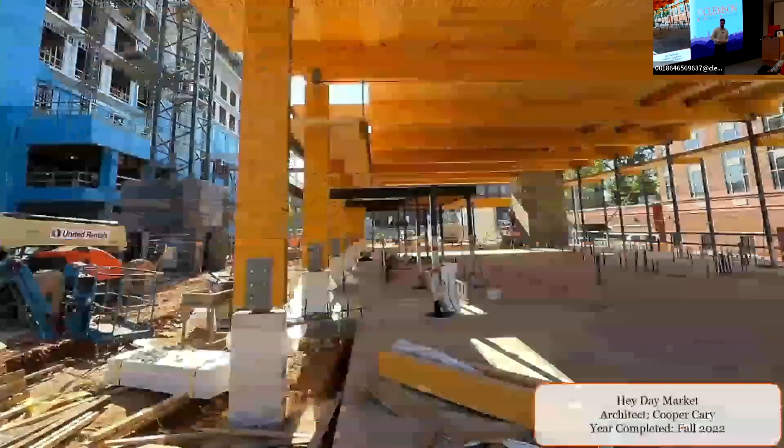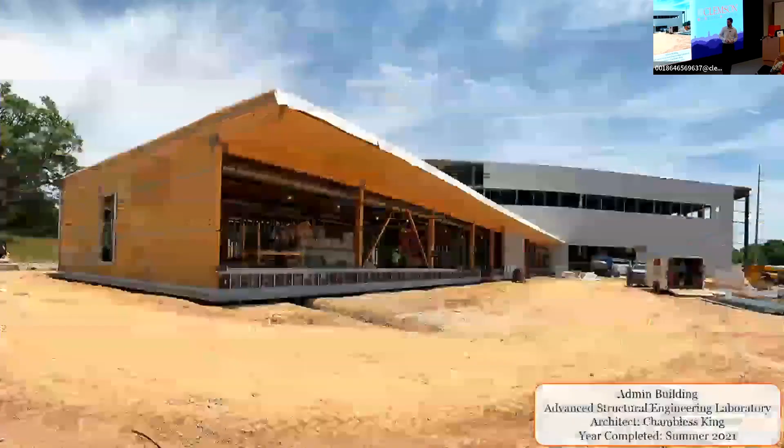So I'll start off with, here we are in this room. I'm assuming most of us are advocates for mass timber and timber buildings. And so I'll just show first a few examples of some timber structures here in Auburn that we're very proud of, and a few others that highlight why we love this material so much. This is the Heyday Market and the Culinary Center right next to it that Auburn opened in fall of 2022. Beautiful building. Glulam columns, CLT ceiling, and this is what it looks like right now on the inside with a lot of different shops. Students operate a lot of the spaces, and it's been a very popular hangout spot since it opened. A beautiful building.

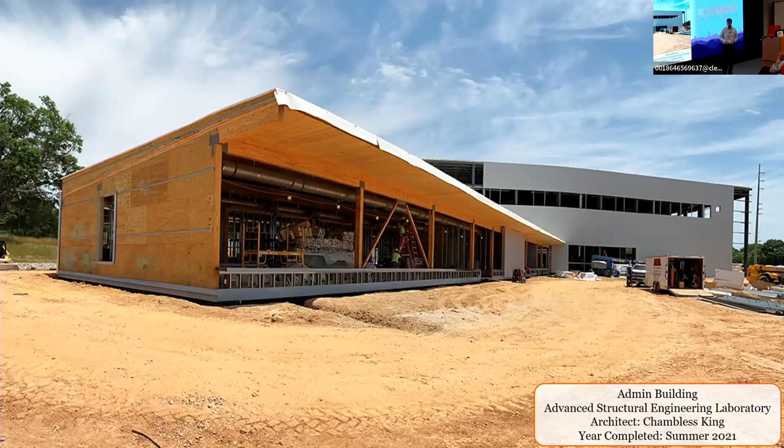I would also highlight something near and dear to our heart. This is the admin wing of our Advanced Structural Engineering Laboratory. This opened in summer of 2021 and was actually the first mass timber building on our campus. And so we take a special pride in that. As part of it, we had a mass timber building, a steel building, and concrete, kind of a back wing. So we tried to represent all the different materials under one building. This is the outside of it under construction, CLT ceiling, glulam beams, and heavy timber columns. And this is what the inside looks like. This is our grad student spaces, and it's a very open, inviting, great collaborative space to work in. And of course, very proud of this building as well.

And then I thought I'd highlight a couple others that I've really enjoyed that you all should be familiar with. So of course, we have the Andy Quattlebaum Outdoor Education Center. I really loved being able to visit that over the summer, and it looks like a fantastic spot. My only disappointment was that I wish I'd brought some stuff with me and had some time to take some kayaks out and enjoy that space. It looks like a wonderful resource.

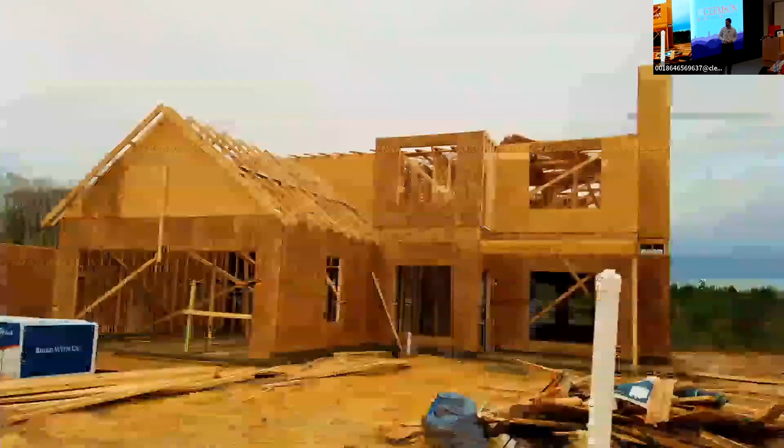But I also want to call attention, with all that's going on in mass timber, and it's wonderful, it's really expanding the market for timber. Let's not forget about the low-rise single-family home. I was doing some rough calculations this morning. About 18 million tons of lumber each year go into light wood frame. So there's still a ton of market for this. It's growing.

It's necessary to maintain affordability of our structures and provide for affordable housing throughout the U.S. and really around the world as well, which is such an important concept as we adapt to climate change and just everything else that's changing in our world.

And in that, I'll throw a quick plug in here for the Rural Studio for our architects. You may be familiar with this. Rusty Smith and their team do such a fantastic job doing low income, affordable housing, and doing just a great job with those designs. And this is a necessary part of it in the utilization of wood in many different structure types.

But I want to turn our attention, as we think about, yes, we can look at timber and see the benefits of it and the affordability and the aesthetics of it and appreciate that. But how do we formally capture just how much more beneficial, say, timber is than these other structures? Some of you may be familiar already with life cycle assessments and that process. It used to be more restrictive, but it's becoming more and more common even in engineering to do these life cycle assessments.

If you're not familiar with it, basically it's a way of tracking from raw material, which in the case of wood, you're talking about forest management, all the way through the processing of that material into actual building materials, and then into construction, and then into the use and repair and maintenance of it, all the way to end of life and the deconstruction and where does it go afterwards? Is it a landfill? Is it recycled? And so on.

And these frameworks, and there's lots of different ways the details of these come out, but these life cycle assessments allow us to holistically capture the entire system and be able to compare between, say, timber, mass timber and steel and concrete, and look at things like total embodied carbon or total embodied energy over the entire lifespan.

What I want to highlight here, it's a little bit small, but up here in the top right, a lot of these assessments are done making some assumption of what the lifespan of the structure is. Typical lifespans may vary, but oftentimes it's somewhere in the 55, 60 to 75 years. And so we work these cost benefits and holistic assessments off of this normal use and normal life cycle.

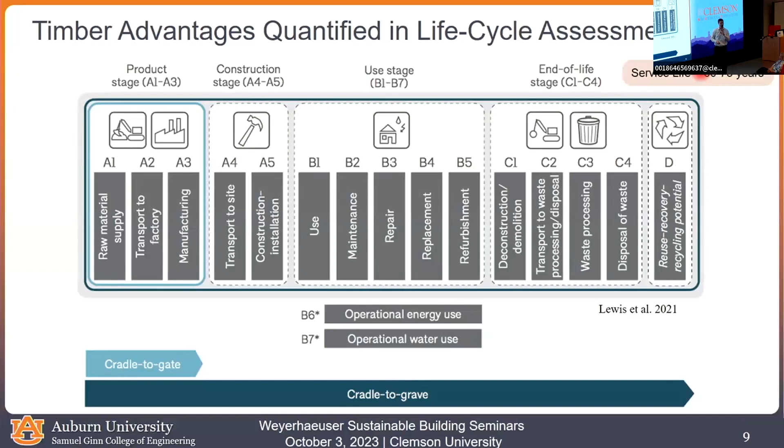What I want to talk about today, though, is what happens when these extreme events we designed for come and interrupt that life cycle. We're talking about quantifying sustainability over the course of 60, 75 years. What happens when 5 years into the use of the building, the extreme event happens? And the extreme event could be a tornado.

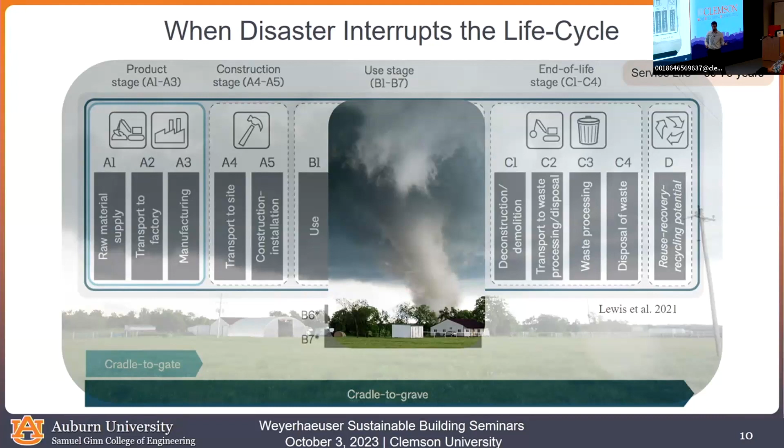I may show my age here. It could be something really extreme, the ultimate unprecedented Sharknado that comes through. You never know. Things change. I don't know how many people have ever actually seen Sharknado. Okay, there's a few brave souls out there willing to admit it. All right, I have not. I've seen clips. That's as far as I'm willing to go with the amount of time that I have.

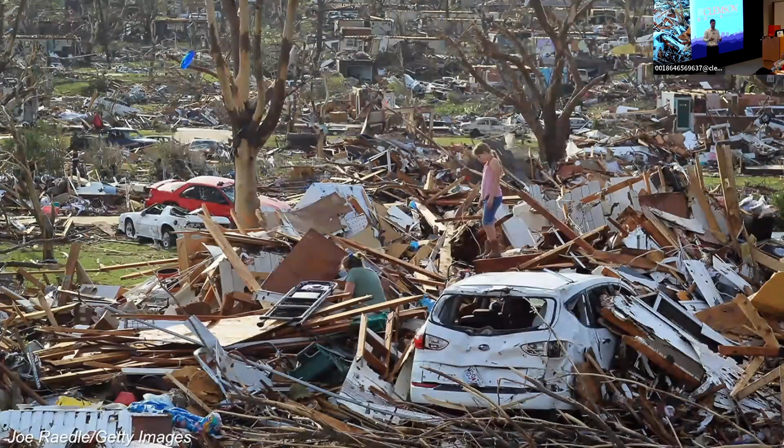All right. So anyway, something like that happens. What happens afterwards? Unfortunately, too many times, and this is what I started my graduate work on, it looks like this afterwards. These timber buildings, light wood frame especially, get this bad rap: yes, it's great, it's affordable, it's easy to construct. Then the event happens and now it's all scattered all over the place. And this is the reputation that's out there for stick frame buildings.

And I see this time and time again after a tornado, after a hurricane, the media tends to focus on the damage. And then you get all the public opinion that's like, why in the world are we still building with stick frame? Why haven't we outlawed that yet in tornado-prone regions? That sort of conversation.

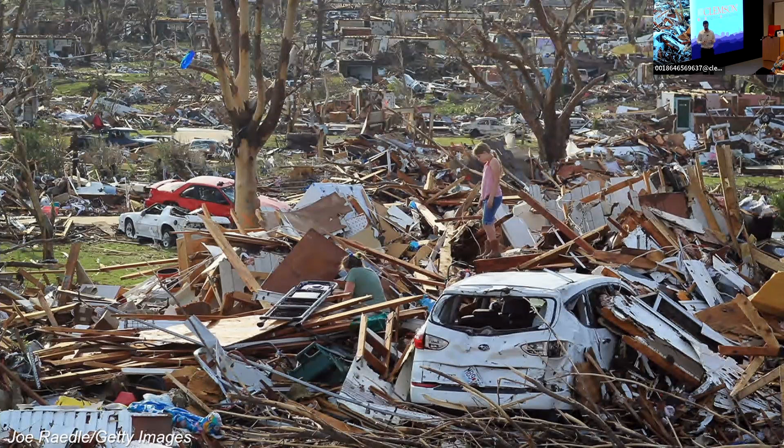And so one of the things that I've done as part of my career, both in grad school and I continue to do it now, is doing lots of these assessments. It's probably been close to 40 now, different hurricanes and tornadoes, going out and doing these types of assessments afterwards, looking at what failed, why it failed, what can we do better, what can we learn from it, and trying to turn this into actionable data that we can learn from and use.

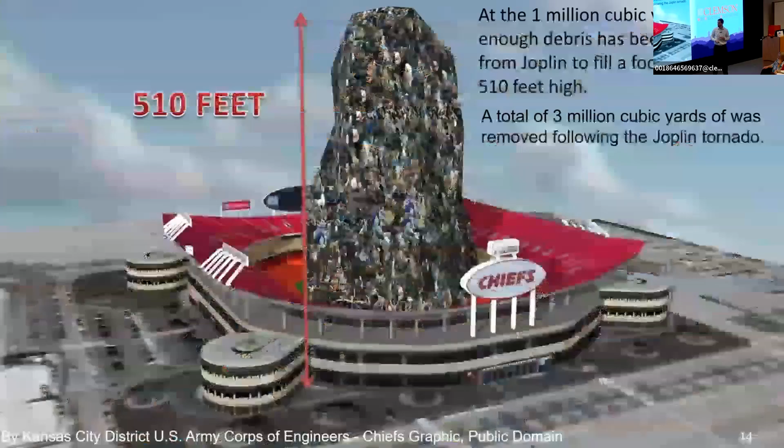Let me extend this a little further, but first a quick point: all this debris we see, when we talk about sustainability, that's not sustainable. This is from an event like the Joplin tornado. The Army Corps of Engineers put together this graphic looking at the amount of debris generated, a total of 3 million cubic yards, the vast majority from timber buildings that were destroyed and their contents. One million cubic yards is enough to fill a football field 510 feet high. So 3 million cubic yards of debris generated by a tornado like this, and all the benefits we had, the carbon sequestration and so on, is now in a landfill somewhere or being incinerated, and we're losing those sustainability benefits.

The takeaway, which we'll touch back on at the end of the presentation, is that we can't talk about sustainability without also talking about resilience. In my mind those are completely linked; we can't have one without the other. There are many different ways of defining resiliency, but I'll use the National Academy's definition: the ability to prepare and plan for, absorb, recover from, and more successfully adapt to adverse events.

With climate change, our hazards are changing, but you can also simply look at our exposure—how we have growing populations in vulnerable areas. With the growing population here in the US and around the world, what does that become? More targets, if you will. Even if the hazard stayed the same, there's more risk out there that we have to adapt to, be able to absorb, and be able to recover from.

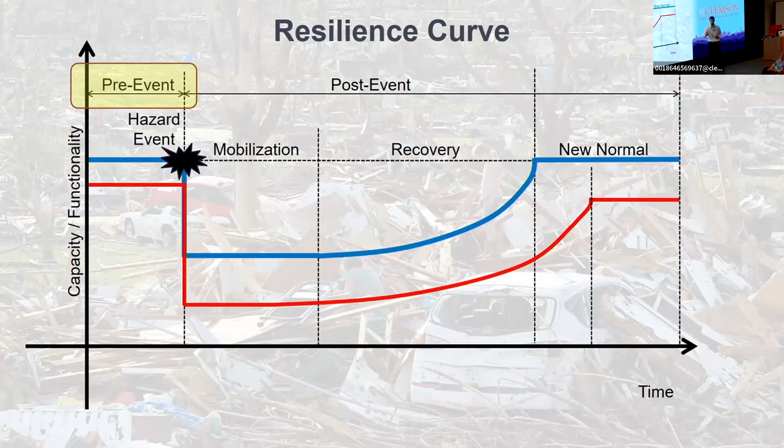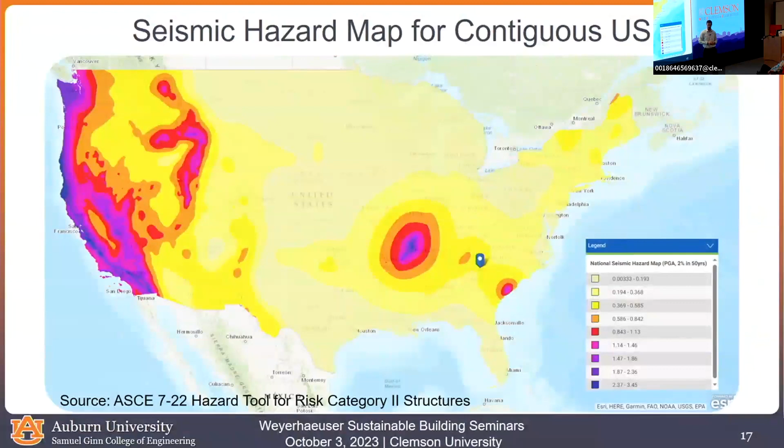What about all the tornadoes? Well, currently, as of ASCE 7-22, there are now some provisions for designing category 3 and category 4 structures for tornadoes, but we still ignore tornadoes for everything else.

We don't consider tornadoes because of the low probability and because of some of the uncertainty in the loading, and so on. So when you talk about resiliency, and about our design levels and how our buildings perform, what can we do to make our buildings more resilient?

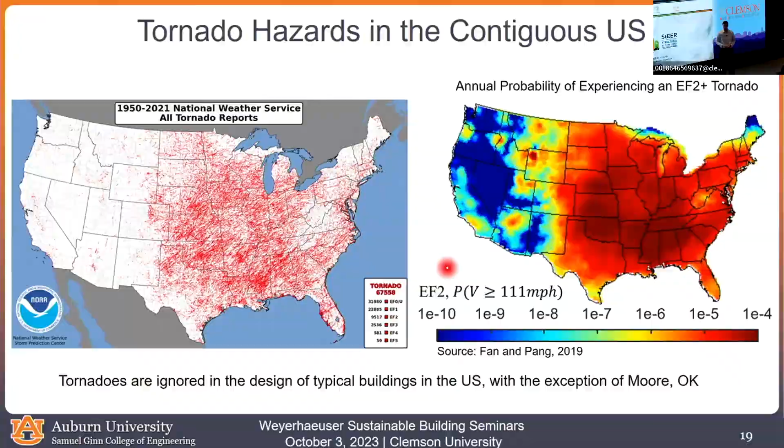I'll put in a quick plug here for the STEER network. I'm an associate director of this - it stands for Structural Extreme Events Reconnaissance Network, funded by the National Science Foundation in 2018. We've been going all over the world doing post-disaster reconnaissance efforts, building the capacity of the community to respond to disasters - earthquake, hurricane, tsunami, etc. - and also developing standardized data sets from these.

For example, here are the 58 different events we've responded to so far. It includes hurricanes Michael, Idalia, and Ida, and different tornadoes as well. Some of these are virtual responses, and some of these are in person.

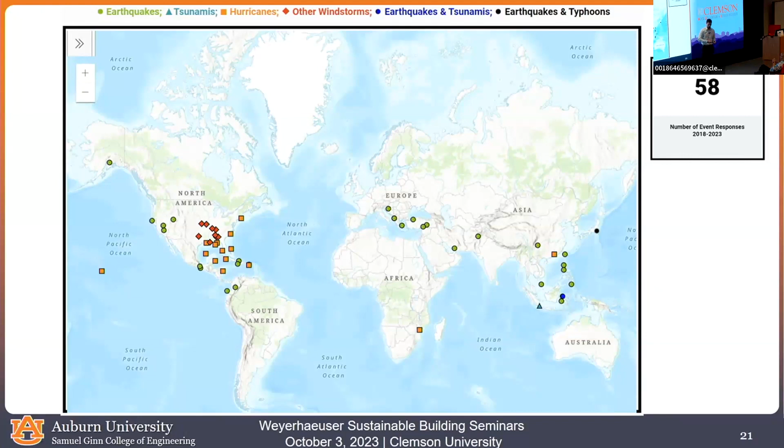As part of these responses, particularly the field responses, we collect lots of data on how different buildings perform, and we do this in a number of ways. We may have performance assessments in a smartphone app, a survey we fill out for each one. We utilize street view cameras, surface level panoramas as we call them, drones, and all sorts of other technologies to essentially freeze the disaster in its place, capture as much data as we can, and then try to learn from it later.

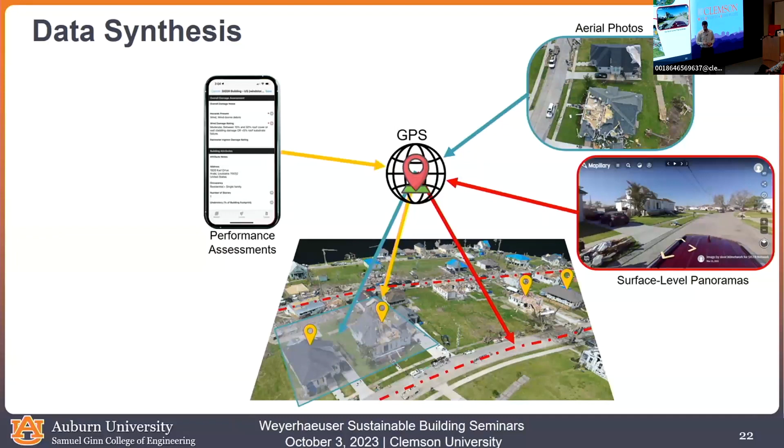When we collect all this raw imagery, we can combine it and synthesize it through GPS to get a complete picture of the disaster - this perishable data - and link it to the hazard, and to other building attributes and characteristics, so that we have a standardized database of building performance after disasters.

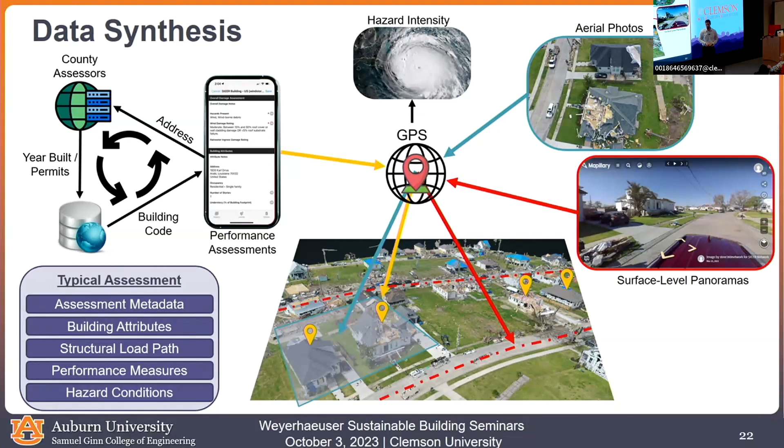We've been doing this since 2017 for me personally, and then StEER came along in 2018 to formalize a lot of this. There's lots of data now to look at how our buildings are actually performing, and a lot of these are wood frame structures that we've been looking at.

I'll put a quick note in here that all of this data is also freely available - it's on the NSF DesignSafe repository. If anybody wants it to train some machine learning model on, or do any sort of modeling aspect, there's a lot of good data out there for you to use. If you'd like to know more about that, let me know afterwards.

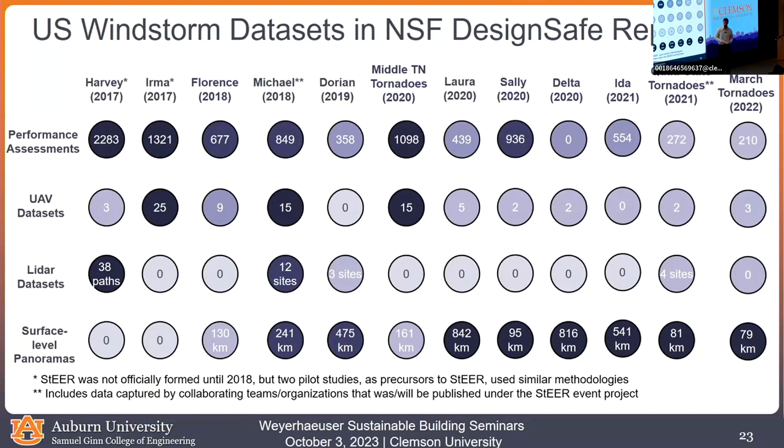I want to talk next about what we're actually seeing from all of these assessments we've done - basically 6 or 7 years of doing these standardized assessments. So what I'll do is show a plot here in a second that talks about what we call component level building damage - looking at percentage of roof structure, roof substrate, roof cover, wall, etc.

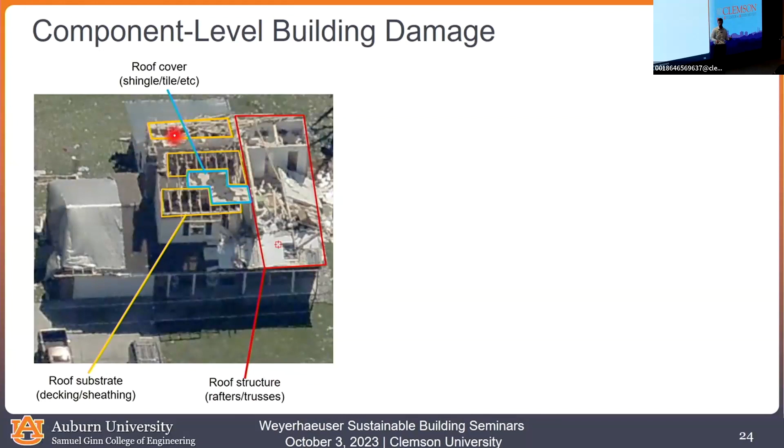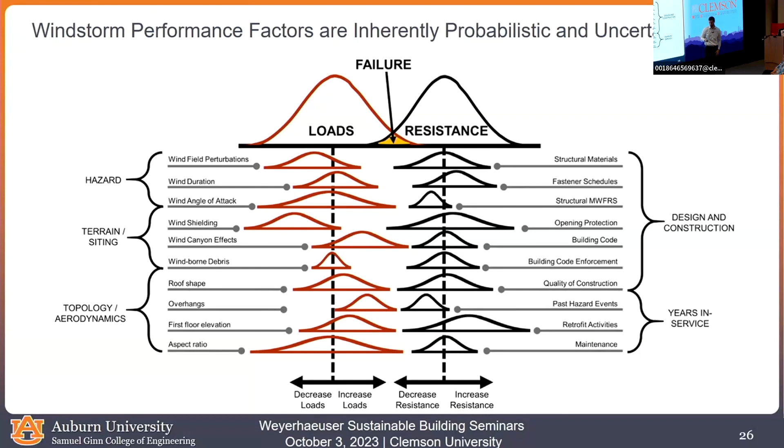So we're trying to unpack some of this. I'll show you a few things we've learned that are practical, tied to light wood frame construction and making it more resilient for tornadoes and hurricanes, with applications to earthquakes as well. One of my PhD students has been working on idealizing the entire load path of a typical home into a chain—what we call a load chain.

If you walk down a typical load path, you've got your rafters, then your roof to wall connection, double top plates, sheathing, and studs. Then you come down to a bottom plate and joist, and then it may either be on a concrete slab or on a masonry stem wall. There's lots of different ways we can come up with these different load path configurations.

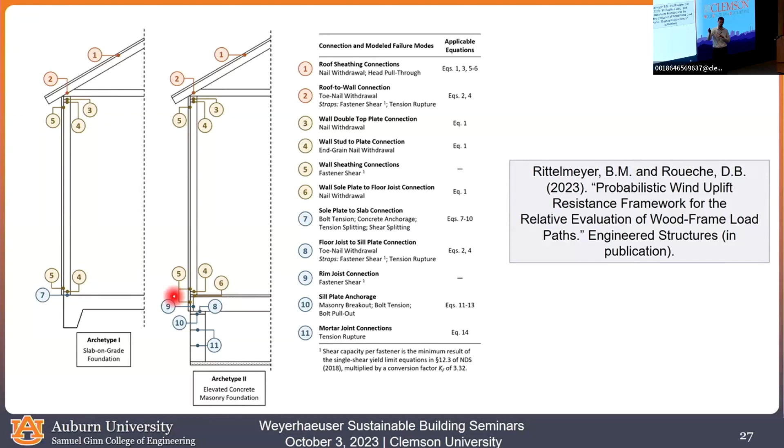He's essentially worked out which ones are in parallel, which ones are in series, and idealized this as a chain. So a little thought experiment before we go further: which chain is stronger? What's the strongest chain?

I have a vote for the top one. Any other thoughts out there? We should limit it—no professors can answer. Just kidding. All right, deterministically or probabilistically? Well, look at the variance of the two.

In a simplistic version of this, a chain is only as strong as its weakest link. So we have a gold jewelry chain—not very strong in and of itself. Now we've placed a really large, strong steel link in the middle of the jewelry chain. But is that link going to do any good? It's just going to find a failure somewhere else.

What most of our wood frame, especially light wood frame, prescriptively designed or prescriptively built structures look like is this bottom example—most of the construction I see when I go out and do these assessments. You have an anchor bolt with a ton of strength, and then the next link in the chain is some really weak connection. You have these very disproportionate strengths strung together, and we're only as strong as our weakest link.

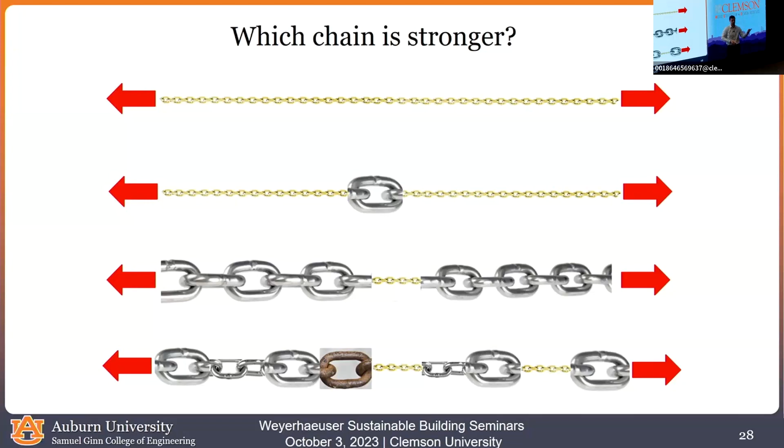So wind is simply looking through it, finding the weakest link—there's the failure. Let me identify a few of these examples just to ground it in reality, with some practical things.

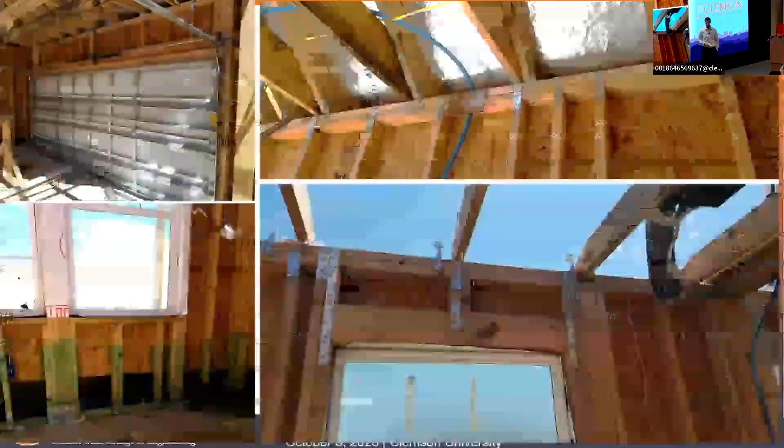Looked inside, and they've got straps everywhere—roof to wall connections tying the rafter to the top plate, top plates tied to the studs, a braced garage door, straps everywhere. Look down at the wall to foundation connection—straps all over the place, anchor bolts, half-inch anchor bolts at 6 foot on center, oversized washers. We saw this and thought, okay, this is what we're telling everybody to build like, and it just got demolished by a hurricane.

What's the problem here? A little forensics, and here's the failure sequence. One, it was a construction site, so there was lots of debris flying around from loose construction. On the front, there's a smaller garage door that a piece of large debris impacted, creating a large opening. The wind enters that opening and pressurizes the interior of the building.

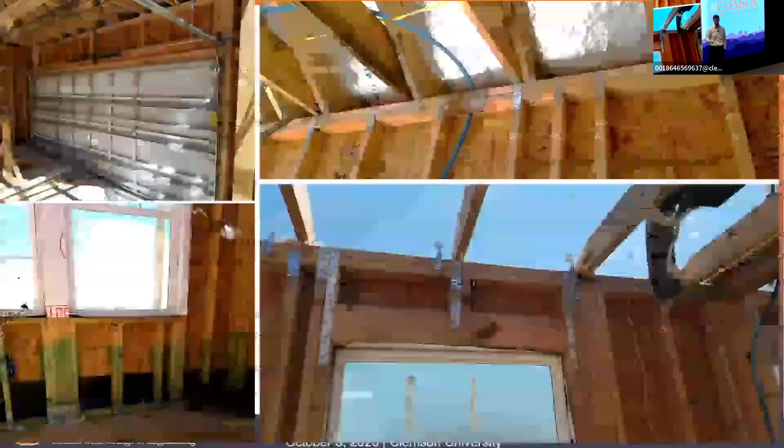Wind is going to find a weak link—and what was the weak link? Up at the ridge, where all the rafters come together, there were no straps, nothing—it's just toenailed into the ridge. So it starts to peel up there, wind catches it, flips the whole thing over, and now you've lost your roof. All of those straps that were there didn't matter; they demolished the house and had to start over again, because wind found the one weak link in the structure.

So what I've been trying to do in a lot of our assessments recently is model and identify in the field these common weak links that we're seeing. I'll highlight a few of these.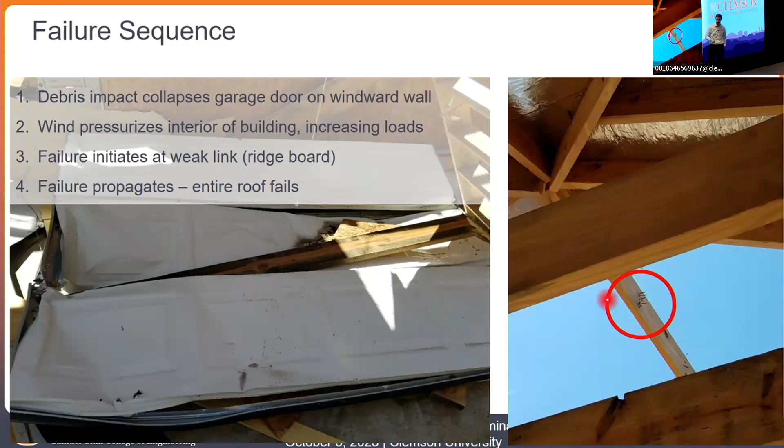Starting at the top, the roof sheathing or decking, the top of the load chain. In order of increasing capacity, there are things we can do that go from weak to strong. First, fastener spacing. 6-12 means 6 inches on center on the edges and 12 inches on center in the middle. We could increase that to 6-6 in some coastal areas, or even 4-6, where it's 4 inches on center on the edge and 6 inches on center in the field region of the decking. Capacity increases as we increase the number of nails.

We can also change the fastener type. A lot of older homes use staples, which is really not a good way of doing it. There are common nails or smooth shank nails, deformed shank nails, which are ring shank or spiral shank and are really good, and screws as well. I'll show some differences between the capacities here in a second. Lastly, you can increase the length and diameter, and all of these will increase the capacity.

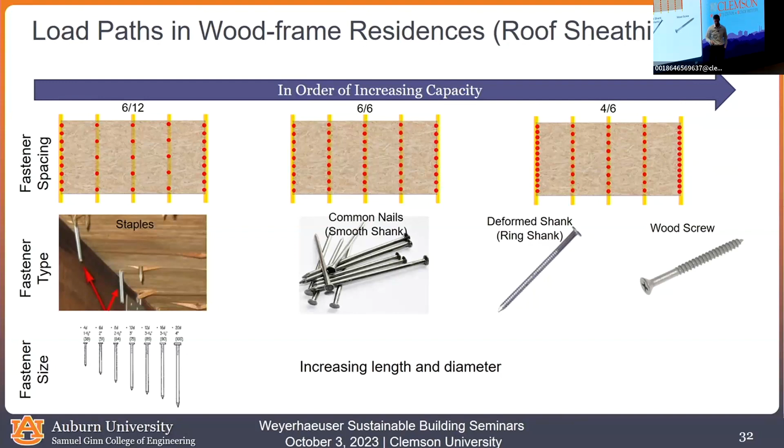To give you an idea, if we use a smooth shank nail, a 4D nail, which I've seen in a number of buildings, with typical 6-12 spacing, we get a mean resistance of about 40 PSF, which is in the EF0 tornado range. If we keep the exact same spacing and switch to a ring shank nail, we're up to 170 PSF, in the EF3 tornado range. Same spacing, really no cost difference, just switching to a deformed shank nail, and the capacity jumps up almost 4 times.

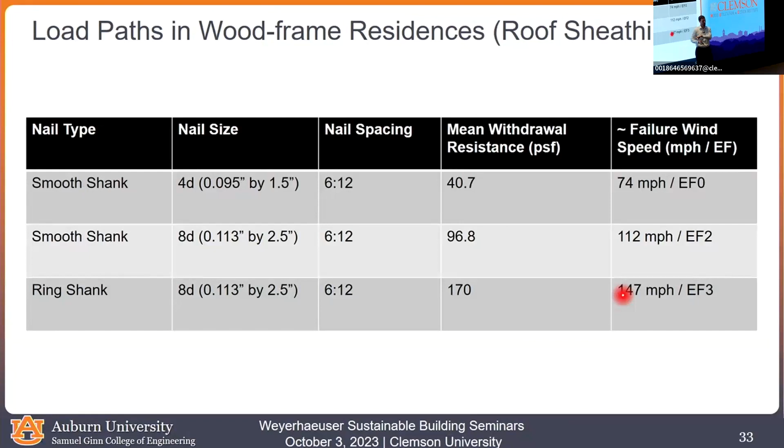But then, of course, that's our nice model of what it should be. And then you have the real world, right? So in the real world, what happens?

You get lots of what we call shiners, where they miss the nails. We saw this in Arabi back in 2022 - some missed nails. You also have a lot of nails that are really close together, which ended up splitting the sheathing and creating a failure point there.

We also had, here on the far right, where they basically overdrove the nails, using a nail gun at too high a pressure, shooting through half the panel as it goes into the wood. Now the panel just pulls out around the head - the nails are still stuck in the wood, but the panel breaks out around it. So you should have 150 PSF of pressure, but from a modeling standpoint, you may only be getting 100 because you're compromising the structure.

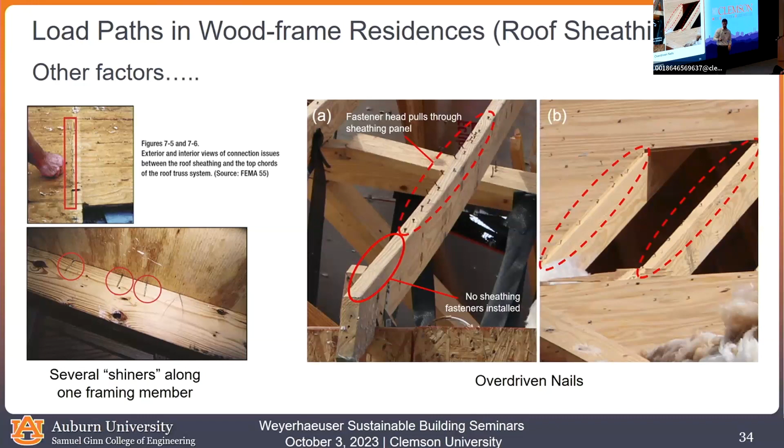This is Rolling Fork, Mississippi - some of you may have heard about this one earlier this year. Apparently there were a lot of shiners or missed nails, because there are entire rafters with no nails. Panels are gone, with no nails in them at all. So this is kind of the real world.

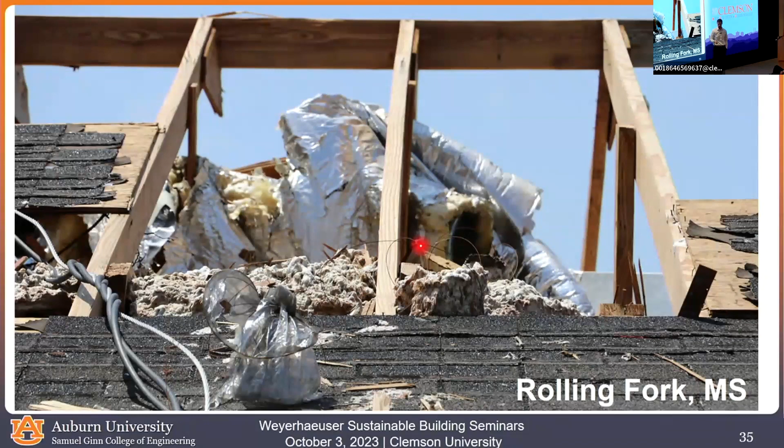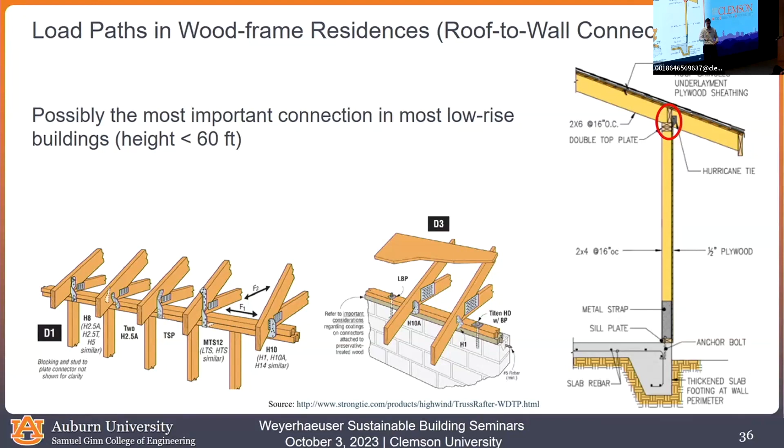Roof to wall connections - this is perhaps the most critical connection in light wood frame construction, because if you can keep the roof on, that helps hold the walls together and provides life safety. There are lots of ways you can do this connection, but what are we seeing here?

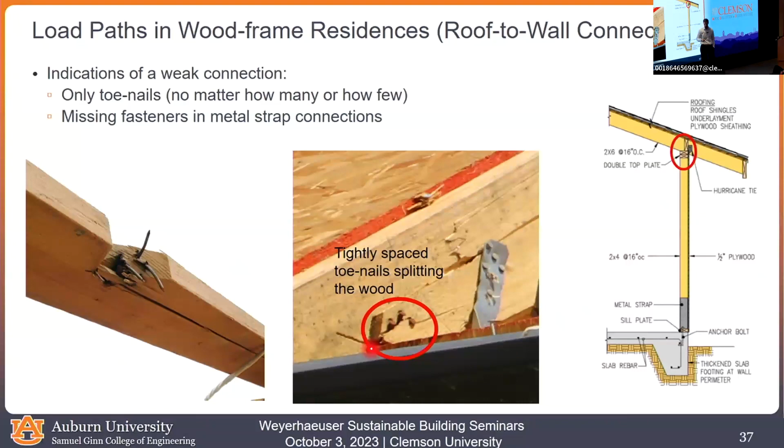In a lot of our older buildings, we're still using toenails, which just use angled or inclined nails - you can do it this way, but it's not a great way of doing it. I'll show you capacities here in a little bit, but they'll maybe put them too close together and split the wood, or not use enough. Either way, you're limited in the capacity you can get there.

Or there's things like, again going back to the Rolling Fork, Mississippi tornado earlier this year, where they're using a clip of some kind - it may be a little hard to see, but there's only one nail, up in the top left, and that was it. Now you might say, but hey, it still stood, right? This was further away from the path. These are all very similar homes, and all the ones closer to the tornado path were completely wiped out.

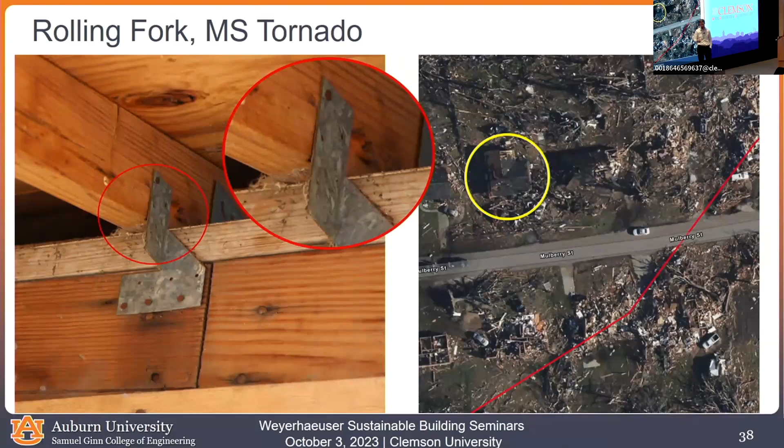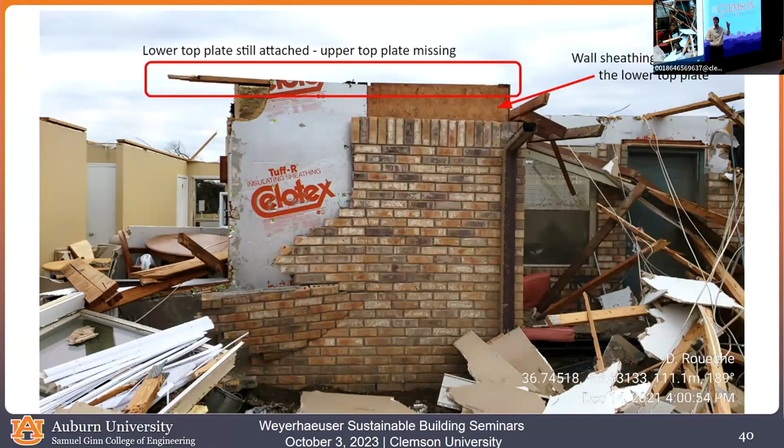This is from the Mayfield tornado in 2021. Same thing, used hurricane clips, and our lower top plate still stayed in place, and the rafters or the trusses just failed and pulled the upper top plate with it. All the hurricane clips still attached to it. Just found the next weakest link.

So to give you an idea, here's sort of the average ultimate capacity of some different configurations. So here's just 3 toenails, which is a very common practice in a lot of the older construction. You get about 400 pounds of resistance. All right, now 400 pounds sounds like quite a bit.

Anybody squat or bench 400 pounds? Brandon? All right, Brandon can do it. Okay, that's pretty impressive if you can do either. Bench certainly, if you can squat even that much, you're doing pretty good.

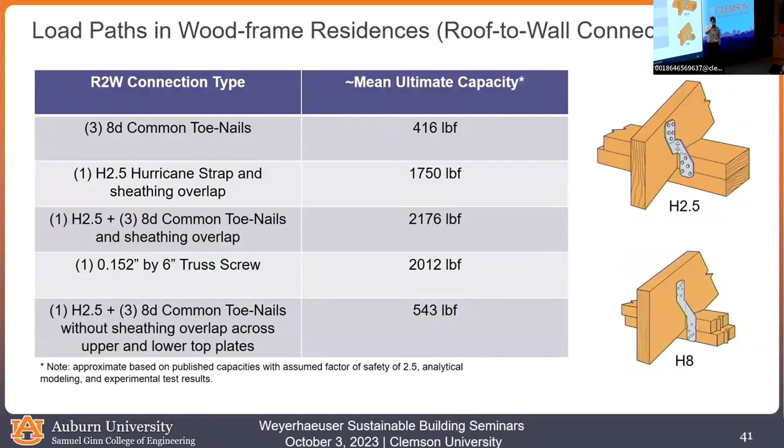So it sounds like a lot. An EF2 tornado is going to apply thousands of pounds of force to a typical home like this, given the size and spacing and so on. So we need stronger connections. We can use an H2.5, and as long as the sheathing overlaps both top plates, providing that continuity, you get about 1,750 pounds. But jump down here real quick for sake of time. If we use a hurricane strap, but we don't link the upper and the lower top plates together, we only get 540 pounds. So we get a little bit of an increase over a toenail, but we've got a lot of capacity there that we're wasting because we're using this really weak link to connect everything together.

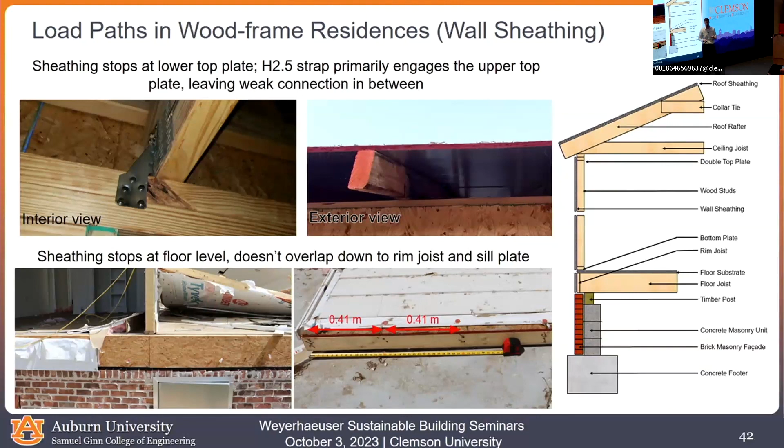So here's an example of that. On the inside, you may use an H2.5 that just barely kind of catches in between the upper and the lower top plate. And then on the outside, the sheathing just catches the lower top plate. So you've got a failure point in between those where the wind just picks it right up there. Same thing happens at the floor level where you have the walls. They build them in sort of 8-foot sections, stand them up, run the sheathing on them, and you get this weak joint in between, a fuse, if you will. Failure, entire wall comes down, roof comes down, life safety risk, all of the above, becomes a bunch of debris going into a landfill. A couple more just quick things here.

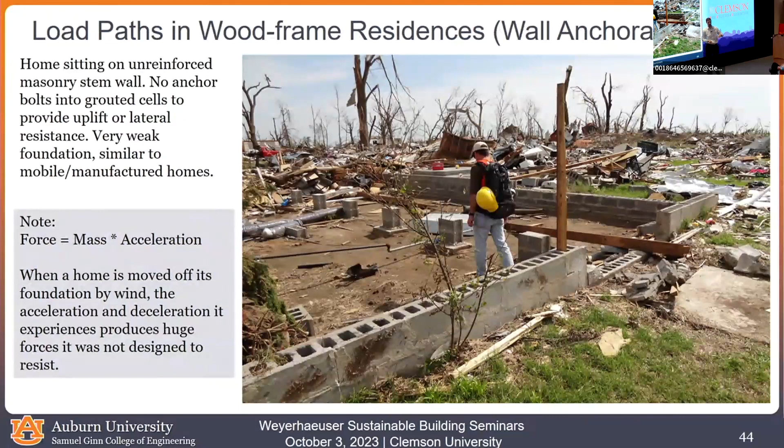So wall to foundation connections. This is perhaps the most important connection for life safety. And there's all sorts of different configurations here, from, this is in Tuscaloosa, where you just have wood frames stuck on empty cinder blocks, no positive connection there whatsoever. Tornado picks the home up, throws it. Huge life safety risk. Then you get cases like this where you've got a grouted cell every 16 feet, but no nut, no washer. Okay, again, you've got a lot of capacity in that anchor bolt, but the next weak link has very little capacity. And so as a system, you have very little capacity.

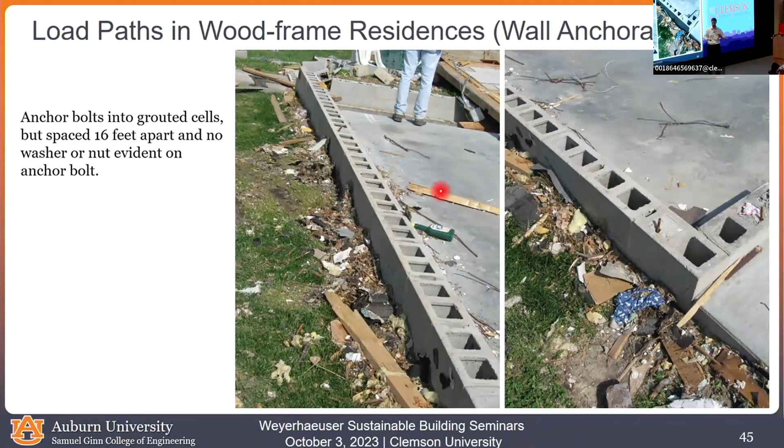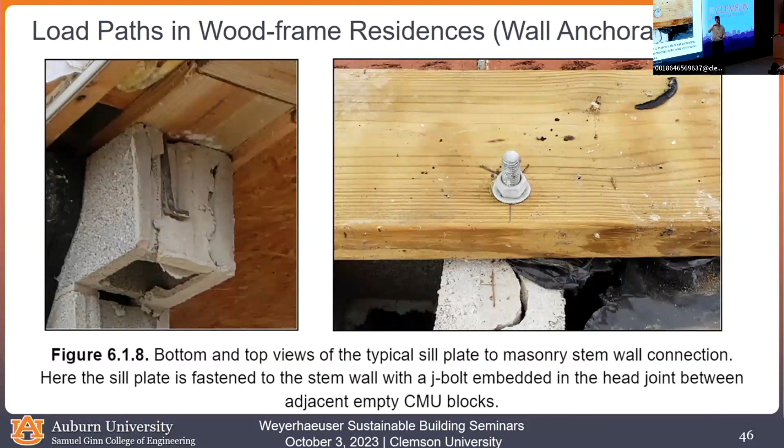Or things like this from Nashville, Tennessee in 2020, where you've got anchor bolts stuck into the head joint of a cinder block, and in these empty blocks here where you've got all the capacity in the steel and you're not really using any of it. Or you get things like this. This is again from the Rolling Fork tornado, where now, okay, we've got an anchor bolt that's going into the concrete. Now our wood is splitting around it. What's going on here? Well, we're using this tiny kind of 1-inch washer here.

And I don't know if anybody's from your wood design class in here, but if you can imagine in this case up here, if the load is being transferred to our bottom plate through our sheathing, and we've got an anchor bolt here, what's going to happen is we get essentially tension perpendicular to the grain in these extreme fibers. Wood is extremely weak there. And so it just snaps up and breaks. And so if we use a 3-inch square washer that extends the bearing over the entire surface, you get a, drawing a blank on the word, I'll come back to it.

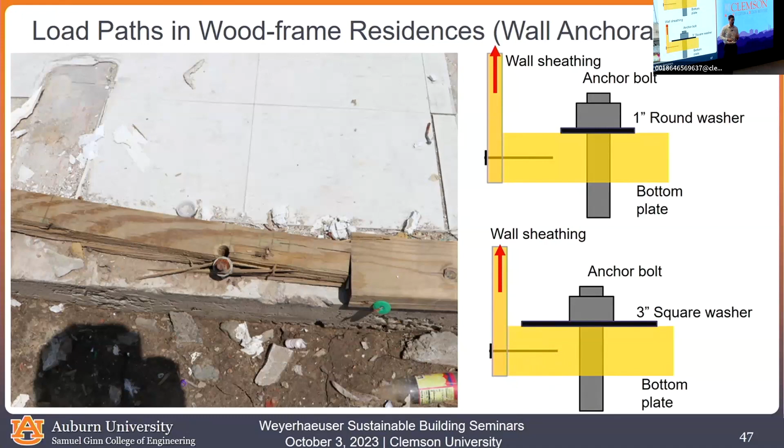But it extends, so we don't have as long of a moment arm, we don't have as much stress here at the bottom, and it's a much, much stronger connection. And so again, similar thing here. If we use 1/2-inch anchor bolts, 6 foot on center, and use that 1.5-inch round washer, even with the wood sheathing overlaps, we got about 180 pound per foot of capacity. If we use a 3-inch square washer, we're almost over 3 times that capacity, just by switching out a washer.

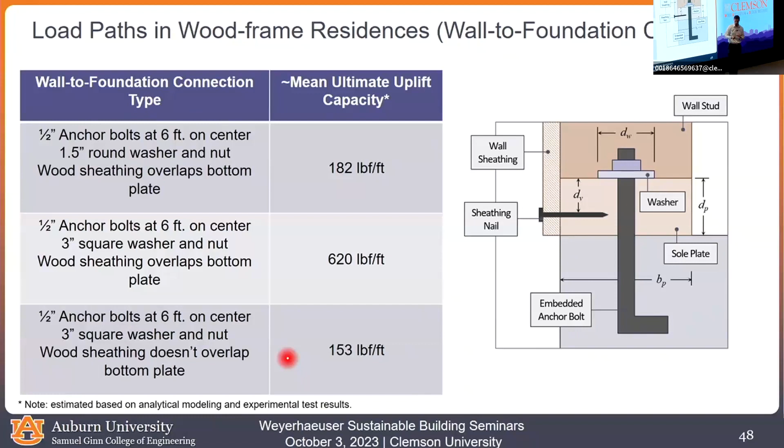So they have these little things, structural fuses that go all throughout the load path that we're trying to identify, develop the modeling for, to be able to analytically show exactly the benefit of these things and improve education and the resilience of our communities.

How am I doing on time? Ooh, I'm almost out of time. Okay, run through this very quickly.

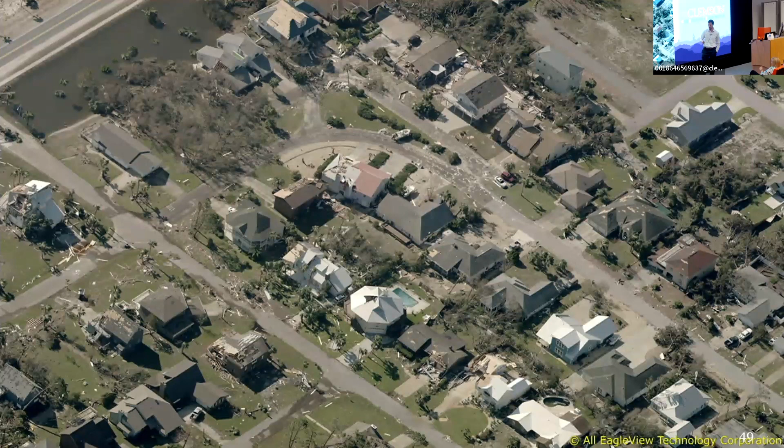So because of these and many more, what we end up getting is things like this, where you have a community in Panama City where you've got lots of damage throughout, many homes with roof structure damage, others that are doing okay. And then you've got communities like this that look almost just fine after the hurricane. These communities are right next to each other. They saw the same wind speeds. Ones are built properly, proper load path, attention to detail, engineered, the others aren't. You see very, very different damage patterns.

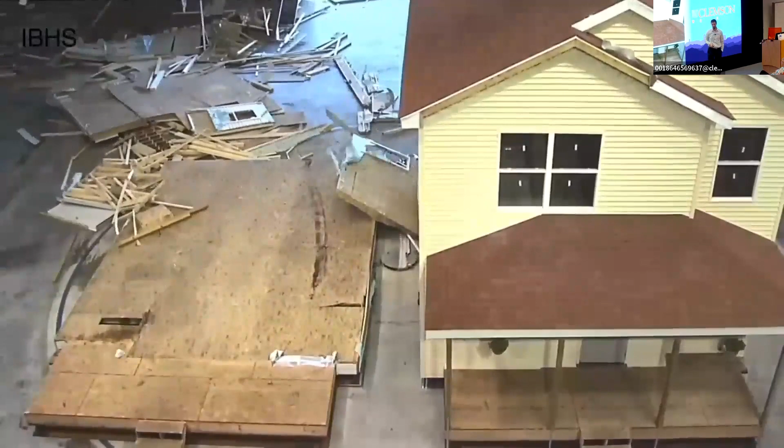I'll skip through some of these. So one or two quick videos here. Many of you may be familiar with the IBHS. It's a massive wind tunnel facility. They can put 2-story buildings out in front and put hurricane winds on them. On the right was their fortified construction that uses a continuous, engineered load path. On the left is a bare minimum kind of old construction technique. Obviously different performance. How many of you would want the home on the right? Okay, I think we would all agree there.

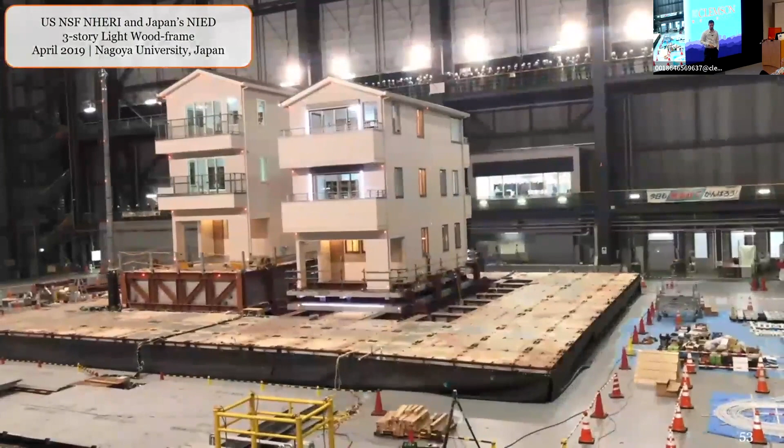All right, it's not just wind. I've talked mostly about wind because that's my background. But we can design resiliently for earthquakes as well. This was some large-scale shake table testing done in Japan, 3-story wood frame structures subjected to some very strong earthquakes, and you see lots of movement, lots of shaking. There's some little deformations, but it performed great if we connect everything together properly and engineer.

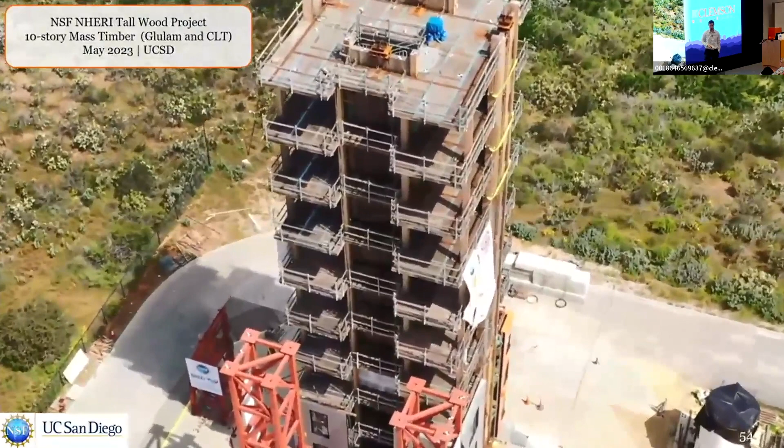This is some recent testing. This is glulam CLT, the tall wood project, an NSF project being done now, doing a 10-story mass timber building. And again, it performs extremely well under earthquake loading.

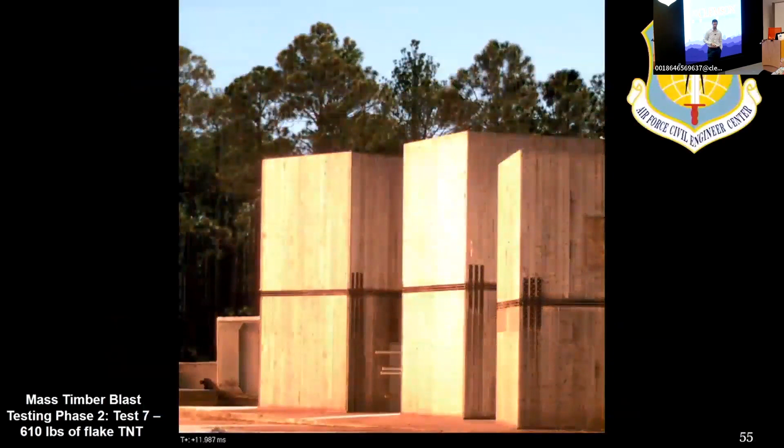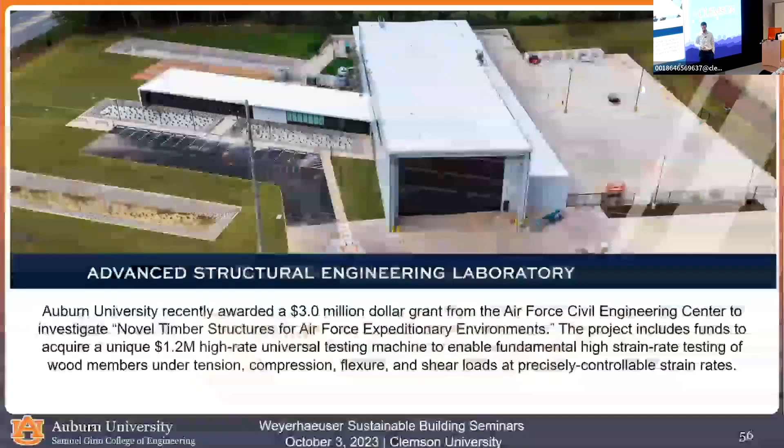And it's not just wind, not just seismic, but there's also blast. This wasn't our work; this is earlier work done on CLT under blast loads being used in military applications. This is obviously a very slowed down version. You can see the deformations, a little bit of damage, but the CLT performed extremely well under the blast loads. We've got a project right now in our Advanced Structural Engineering Laboratory developing this further. We're getting a high rate UTM to be able to test timber under a wide range of strain rates in a controlled manner.

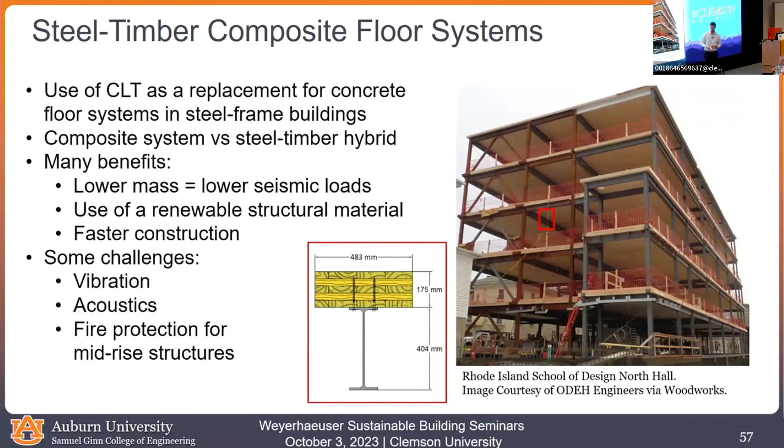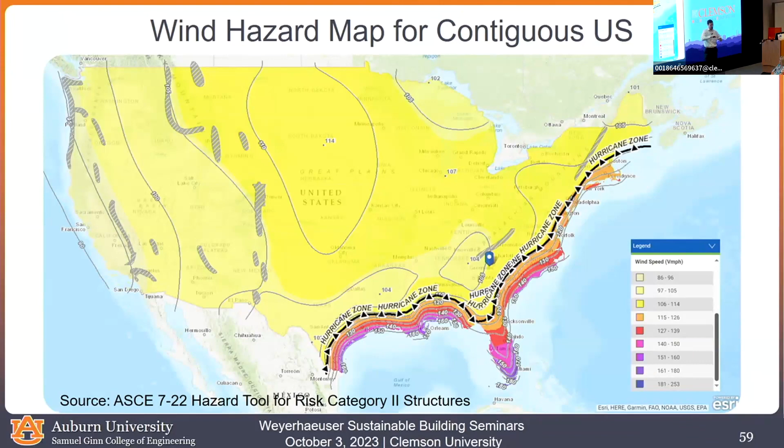So it all comes back to here: we can come up with lots of innovative ways to fix all these, but you've got to remember what is our minimum design level, and if it's a rush to the bottom, a rush to just meet that minimum standard, we're not going to be a very resilient community. So as a community, as engineers, as architects, we have to decide where do we want to be in this resilience curve?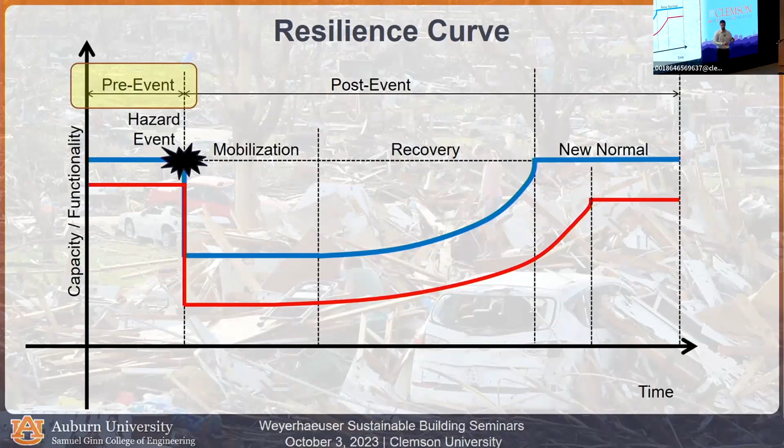So sorry for going a little bit long there. Thanks for your attention. Oh, it's showing there 56 minutes. Am I? Oh, okay. So you got a minute. Okay, I've got a couple of minutes. All right. Actually, then let me actually go back.

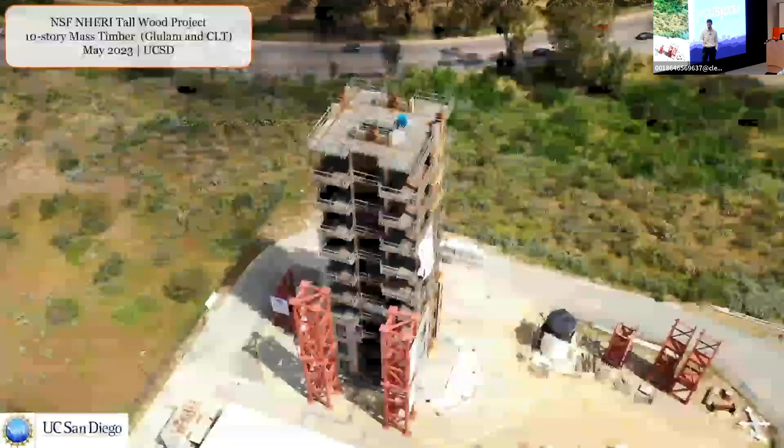Okay, I'll show. So this is sort of the horse and the nail and the horseshoe. And the war got lost if you don't use the right nail. I mean, yeah, it really is. Yeah, I love this. See, again, I mostly deal in wind, so I'm not as familiar with these, but this is a really kind of groundbreaking study. Let me go back one more. All right. And then here.

So again, 10-story building in full scale, glulam, CLT, composite system out at the UC San Diego facility, simulating the Northridge earthquake, simulating an earthquake from Taiwan, I believe it was, one of the strong ones there. Which one? Yeah, like a 7.6 or somewhere around there in terms of magnitude. And this was done just a few months ago, and again, worked great, passed with flying colors. I think the interesting thing about this one is they did like 80 different shakes.

And it's the same structure. So it not only got shook one time, it got shook multiple times over months. Yeah, so they basically did the Northridge earthquake, and then right afterwards just went into another earthquake, not repairing it, not restraining, just went straight into another one, still performed just fine. There's sort of this misconception out there that if we build in wood, we're sacrificing strength or resiliency. Absolutely not. It's not a trade-off between sustainability and resiliency. We can have both.

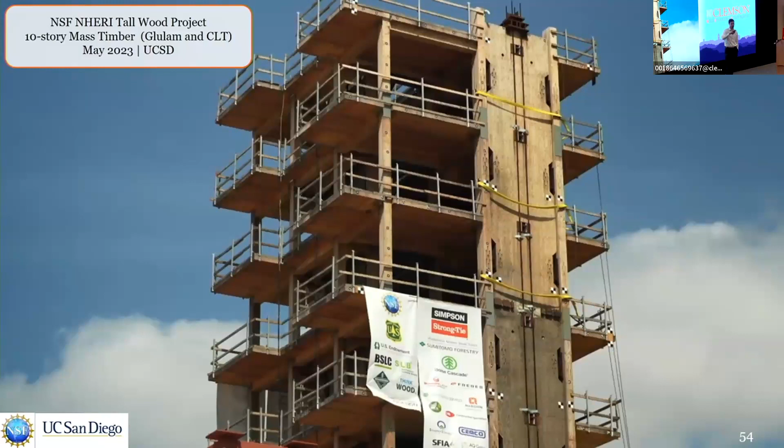No, I didn't include all of it here because I wanted to make sure I could finish in time, but they have video from the inside showing the dining room and everything shaking and falling apart. And even in the previous one that I showed at the shake table, you can see on the inside furniture and everything flying all around. This is a serious earthquake, and the structure itself performs admirably. And again, it's mass timber construction.

Yeah, let's go back to the IBHS one as well. The wind one. So how many of you had heard of the IBHS facility before? Okay, a few of you. So not far away from you guys at all. Richburg, South Carolina. I don't know if I can, let's see. Yes.

Yeah, so pay attention here at the beginning as it plays. Right down here, you'll notice the door pops open. And what happens now? Now the air is entering the building. It's like a balloon filling it from the inside. And now if you think about your loads, you still have the same exterior loads, but now your internal pressure is actually adding to those loads and blowing out the walls, pushing up on the roof, collapsing the structure.

And so that's why, I didn't talk about it as much here because I was focused more on the wood aspect of it, but protecting our openings really is one of the keys to resilient wind construction. Things like your garage doors and windows and doors, because we design the building assuming that they're all going to stay intact. So the moment they break, we've increased our loads much beyond what we designed for, and we get these premature failures. Yeah.

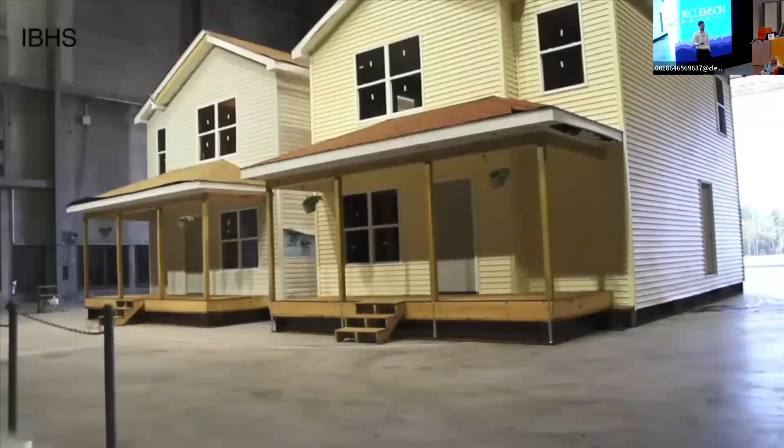So the one on the left was using typical toenail construction, just nails, basically all nailed connections. So nails between the stud walls and the subfloor, not as many nails in the sheathing, things like that.

The one on the right is strapping the roof to the wall, strapping the wall to the foundation, and providing that continuous load path. This was actually a different test they did a little bit later, and they basically braced the door to prevent it from blowing in, and then the entire roof came off instead. That's where you don't want to be in front of that camera.

Okay, so these are great. These are expensive tests to do. They don't do a whole lot of these, but they're great visualizations of being able to see just what, really a couple thousand dollars at most in material and labor, what a big difference that makes in the performance during an extreme wind event.

So you talked about the weak link being often what causes a lot of the damage here. Is there a way to understand where that weak link might be before an event like this? I'm thinking about my house right now. I figure out if I've got a weak link, what I can do to fix it.

Yeah, so the question was, hindsight's always 20/20, right? We can go in after the fact and say, okay, well, here's the weak link and there's the weak link. Can we do that beforehand?

And that's really half the effort that we're doing here with this comprehensive load path assessment - being able to show, well, what is the benefit of switching from a circular washer, a round washer, to a square washer? Okay, that makes a huge difference.

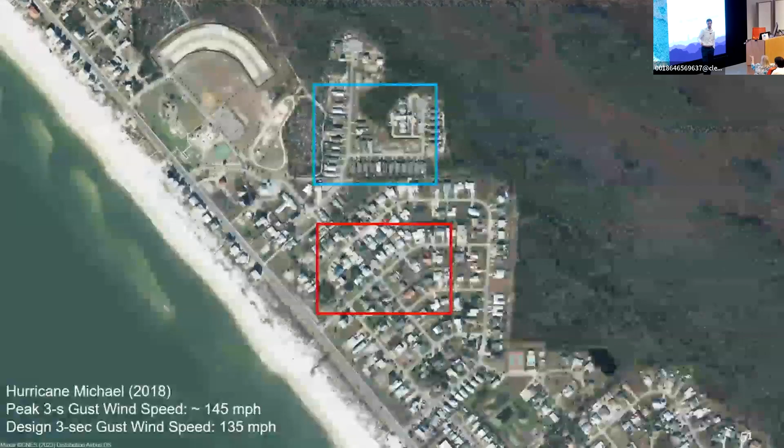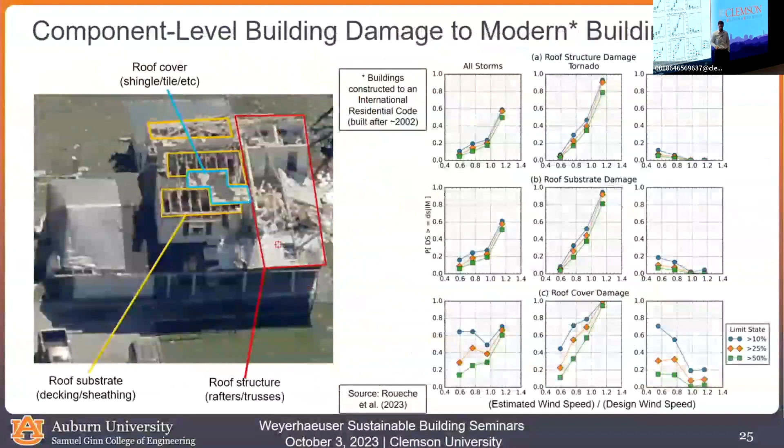The second reason is a little more nuanced: how do we estimate wind speeds in tornadoes? We estimate them based on damage. These are smooth, parametric models of wind speed, but they're still indirectly based on damage. This is the best we have for now, but it's something we're trying to improve. In hurricanes, we have a much better idea of the actual wind speed. In tornadoes, we're kind of guessing at the wind speed based on the damage caused. So it makes sense that as we see more damage, the estimated wind speeds go higher, because that's how we estimated them to begin with - there's a bit of circular reasoning in there.